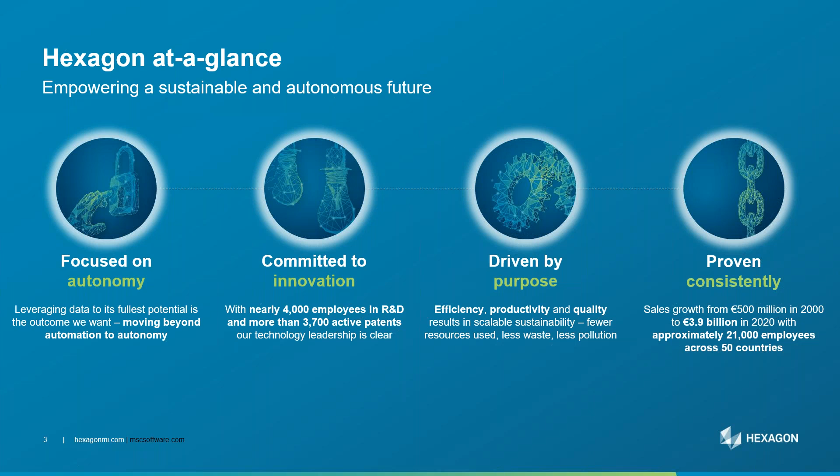So Hexagon is a Swedish-based multinational company with over 20,000 employees across 50 countries. The revenue in 2020 was about 4 billion euros, and it focuses on autonomy in different aspects. And we are committed to innovation with more than 4,000 employees in research and development. The idea behind Hexagon and the mission is to go from mechanization to mass production and in the end to autonomy, so full autonomy,

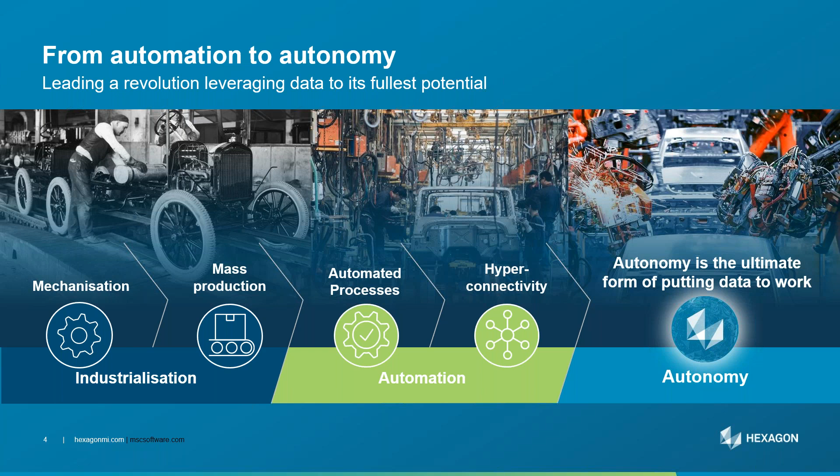profiting from the data. And Hexagon is actually originally a sensor or metrology company. Then it acquired many companies in the software area. And in fact, the idea is to connect the virtual world and the physical world. So just to make it a little bit clearer, Hexagon, as I said before, acquired many companies, and one of the companies Hexagon acquired back in 2017 is the well-known MSC Software in the US.

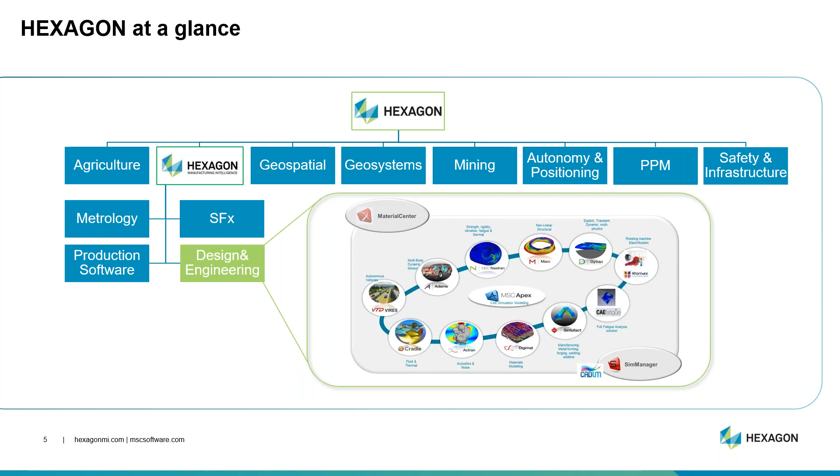And MSC Software is now named as design and engineering within Hexagon, and specifically one Hexagon division, which is called HMI, for Hexagon Manufacturing Intelligence, where we have different business units. And just to make it very clear, what I'm going to describe today will be focusing on manufacturing simulation, and this is actually this center of excellence. So as was said in the introduction, there are different centers of excellence within design and engineering, or MSC. One of them is called virtual manufacturing and costing. So that's the center of excellence I belong to.

And this center of excellence is actually the merge of FTI, so Forming Technologies Incorporated from Canada, Simufact, which is originally a German-based company, and another company called Amendate with additive manufacturing topology optimization software. So what we do here is we focus on process simulation.

So from sheet metal forming, that's basically FTI with Cost Optimizer for cost engineering, then FormingSuite for sheet metal forming, based on shell elements. Then we have the Simufact product suite, Simufact Forming. With Simufact Forming, one can model many kinds of forming processes, such as hot forging, cold forming, sheet metal forming, rolling, ring rolling, heat treatment, and so on.

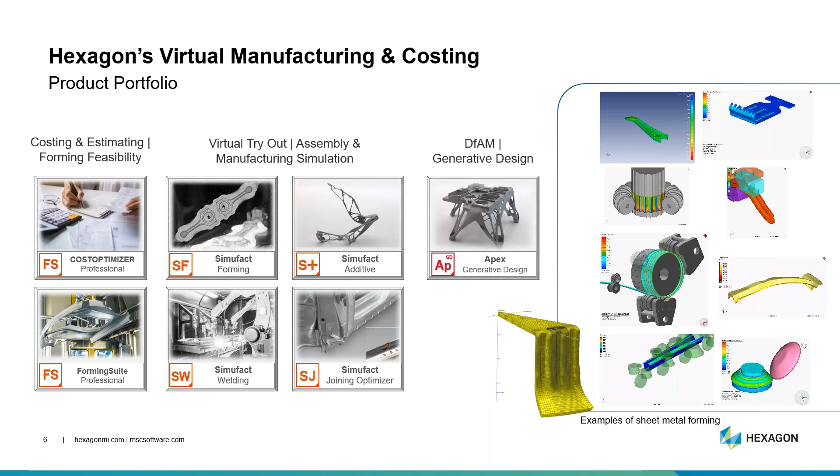Right, now if we go on to EV battery manufacturing and the fundamentals, I would say that if we look at the cells themselves, we have, generally speaking, three types of cells: the cylindrical cells, the prismatic cells, and the pouch. For each kind of cell, there are, of course, advantages and disadvantages. For the cylindrical cell, it's low density, low cost, easier thermal management, and hard casing.

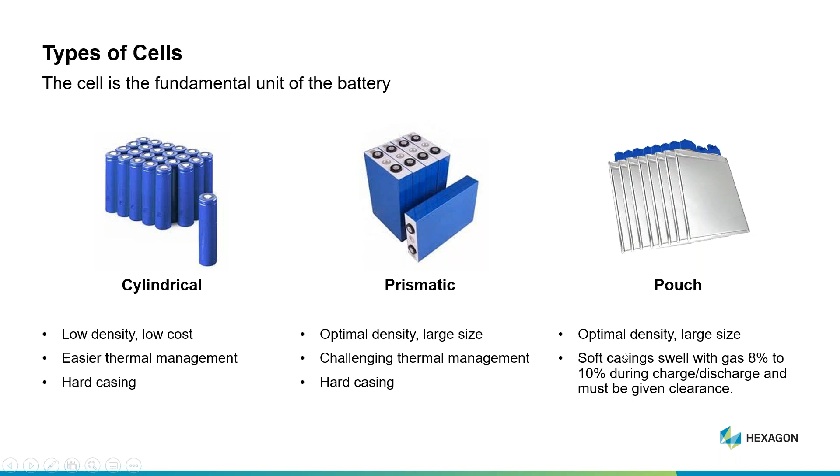Prismatic: optimal density, large size, thermal management has to be carefully taken care of, and there is also a hard casing. So for the first two types of cells, cylindrical and prismatic, we have solutions, and I will introduce these solutions in the next slides. The third one is a pouch type of cell, and for these kinds of cells, we currently do not have any solutions because there is a soft casing, and it's something we are not covering right now.

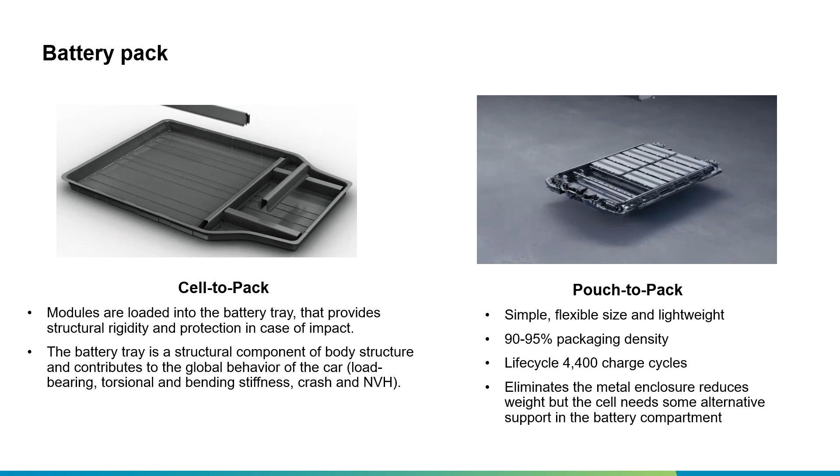Then the packs. So once the cells have been manufactured and put into modules, we need to assemble them into a pack. Be it the cylindrical cells or the prismatic cells, it's quite similar. The modules have to be loaded into the pack and welded and sealed. So now, what are the manufacturing steps of all these different cells and modules and packs? This is what we are going to look at more deeply in the next slides.

So if we look at the challenges with the manufacturing process, as you saw before, we are covering many other processes and industry segments. But for EV battery manufacturing, I would say the challenges are very similar to other industries. So it's a long development time.

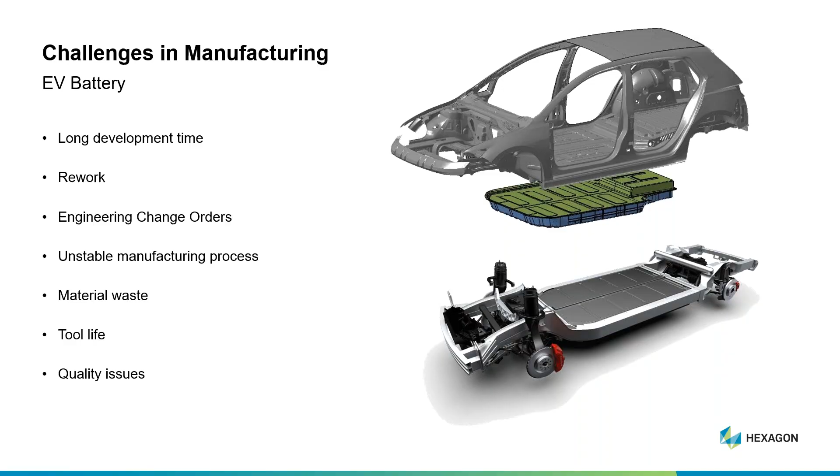And quality issues such as cracks or important thinning and so on. So there are a lot of challenges that need to be tackled in EV battery manufacturing. So what are the solutions that we can bring there? I'm going to go through some case studies about each segment, like battery, module or tray.

So at Hexagon, and especially the virtual manufacturing and costing center of excellence, we offer a suite of solutions or software that can help tackle these challenges that we just mentioned. So the first thing is the virtual tryout.

Instead of spending a lot of time doing physical tryout, machining some tools, trying on the press, for example for stamping, or on the weld side, the welding, we can do all this in the virtual environment. And we have solutions for that, such as Simufact Forming, mechanical joining module, FTI cost optimizer, Simufact Welding, and

MSC Apex. All these products can be used, and of course, we can chain the simulations, meaning that we could simulate one process, such as stamping or deep drawing, and then export the results into the welding tool, for example, keeping the residual stress or the strain information inside the mesh.

Then we can check for early forming feasibility. Even before you design the tooling, you might want to check: is this part feasible, or is formability guaranteed? Will I get tearing or any other kind of problems? And for this, we can use FTI Forming Suite to check all these early steps.

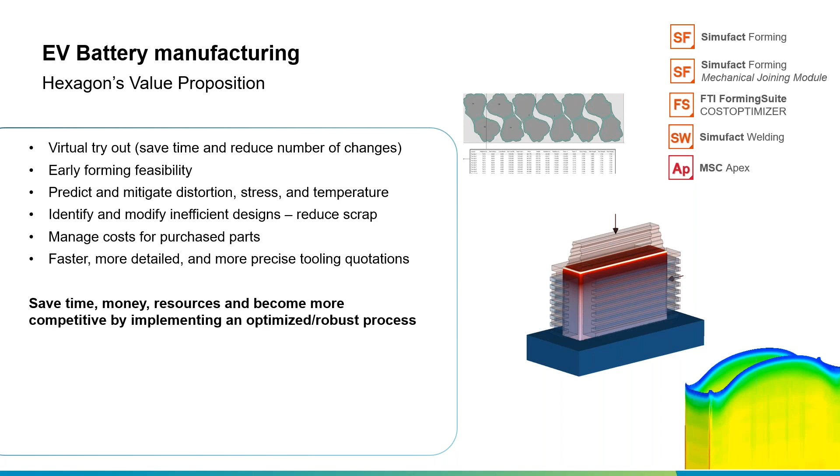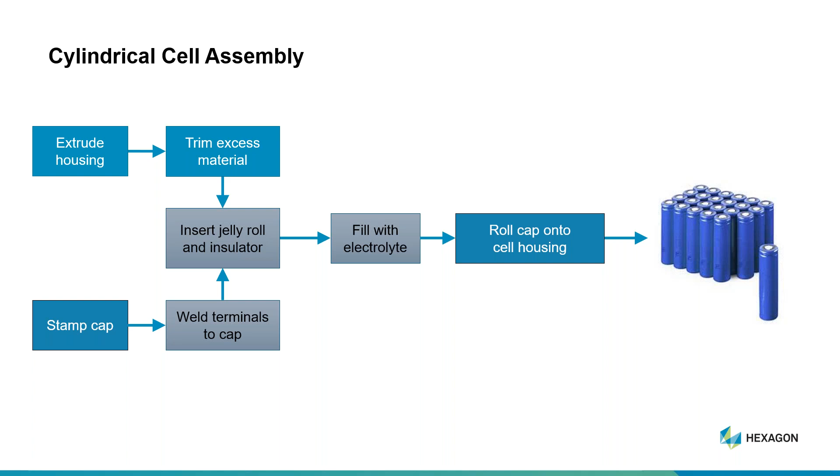You can see the battery housing could be extruded, then the cap is stamped, then there is a trim process for excess material on the housing, and then some chemical processes such as inserting the jelly roll and insulator, welding the terminal to the cap, or filling the electrolyte, which would not be covered by our solutions, and then finally roll the cap onto the cell housing. That's the process workflow.

A relatively similar process can be applied with prismatic cells. There is an extrusion process, so backwards extrusion, where we then trim the excess material. We have examples that I'll show in the next slides.

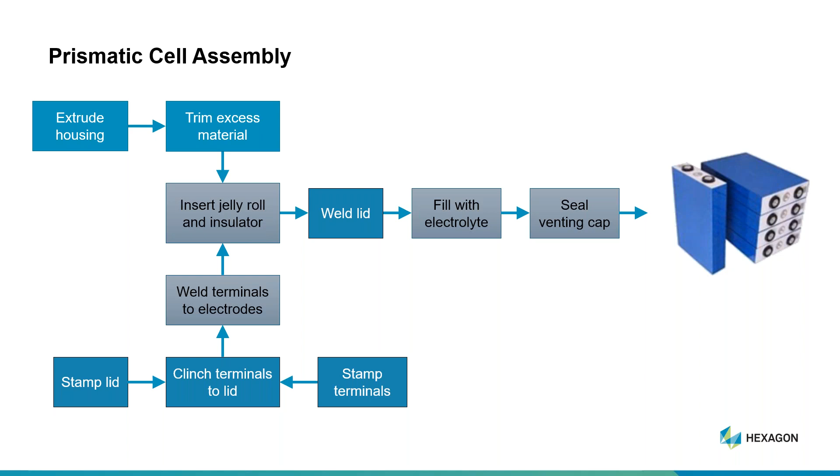Then stamp the lid, do some chemistry operations like inserting the jelly roll and insulator, weld the terminals to the electrodes, and then clinch the terminals to the lid, stamp the terminals, weld the lid, and then finish with the chemical operations such as filling electrolyte and sealing the venting cap. So now I'm going to show some simulation examples.

One thing I didn't mention at the beginning of this presentation is that all our solutions, Simufact Forming or FTI, are basically process-specific applications. Simufact Forming especially is based on the MSC Marc solver, but the user interface and the GUI is actually very easy to learn, and it doesn't require very deep knowledge of numerical sciences or FEA.

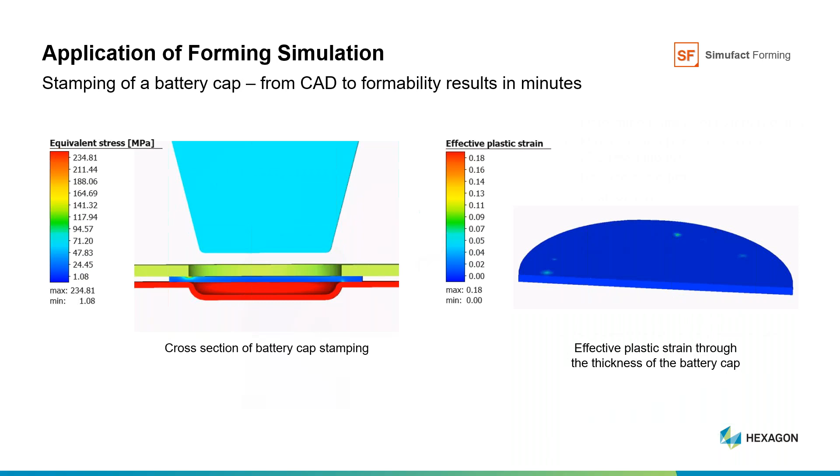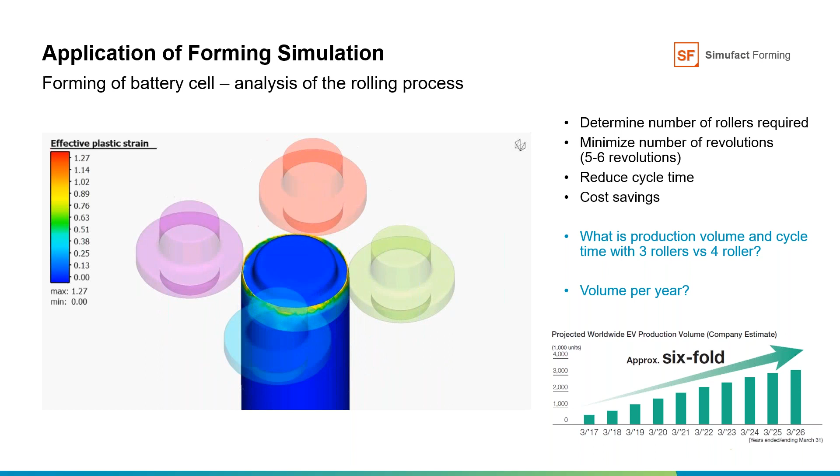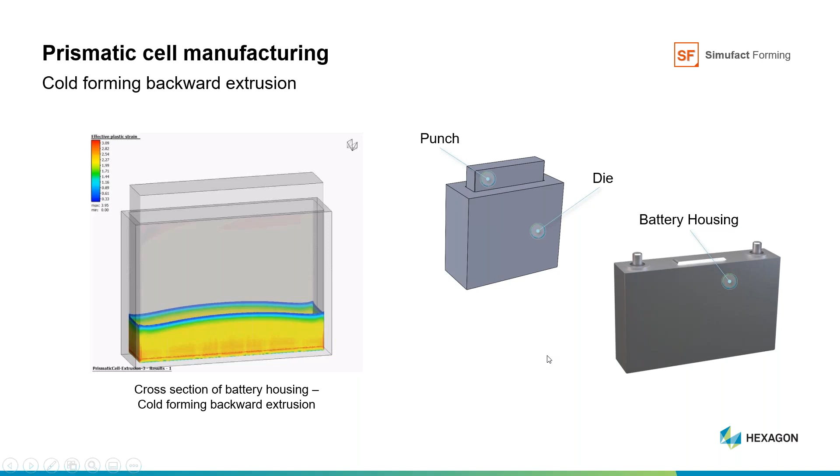So what can we expect from the simulation is obviously the final shape, and see where we need to trim, or if we need to perform a second extrusion operation, and also get information about residual stresses. These residual stresses will have an impact, of course, on the welding stage later.

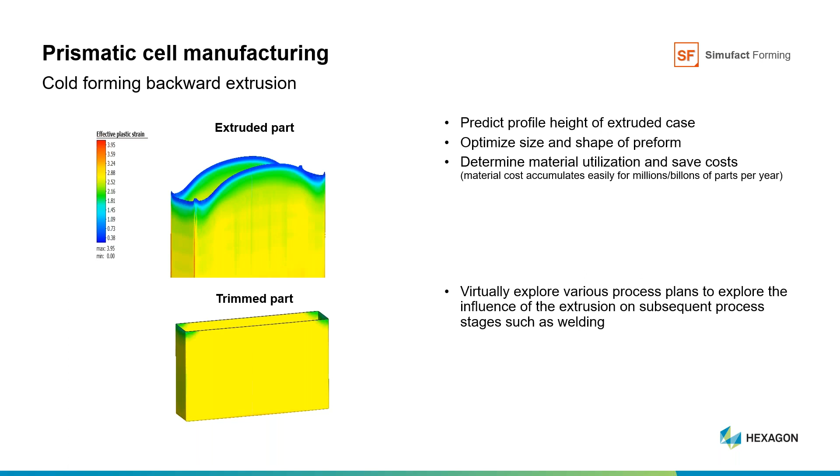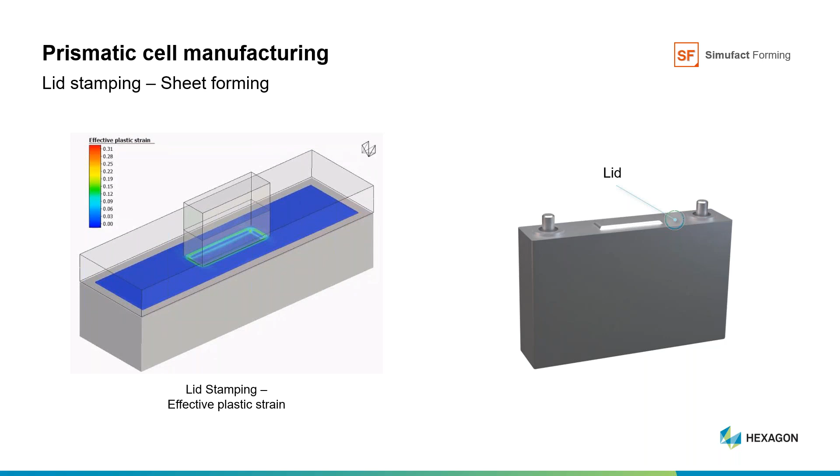Another component of the battery is the lid. So here we can simulate the forming of the lid and also the trimming. Here we haven't performed trimming, but it's possible in Simufact Forming to do also trim operations and evaluate the impact of the trimming on the final shape. So it could be just trimming or fine blanking. So again, in this stage, the user can, in a very early stage and even before manufacturing the dies, optimize this stamping and investigate springback and residual stresses.

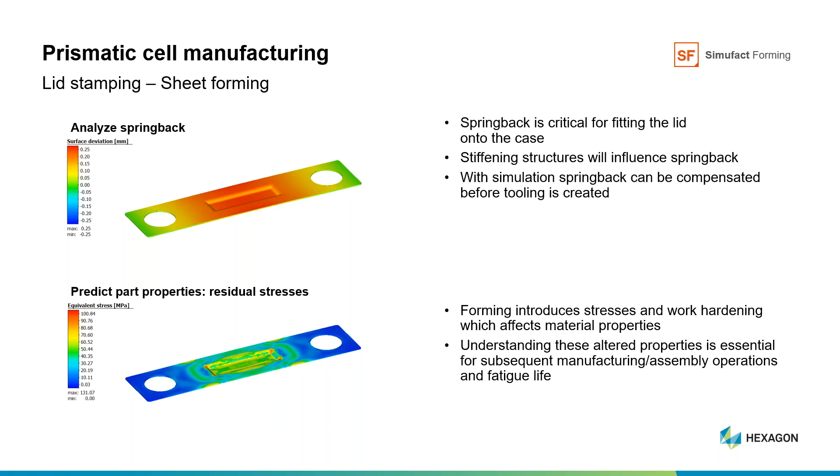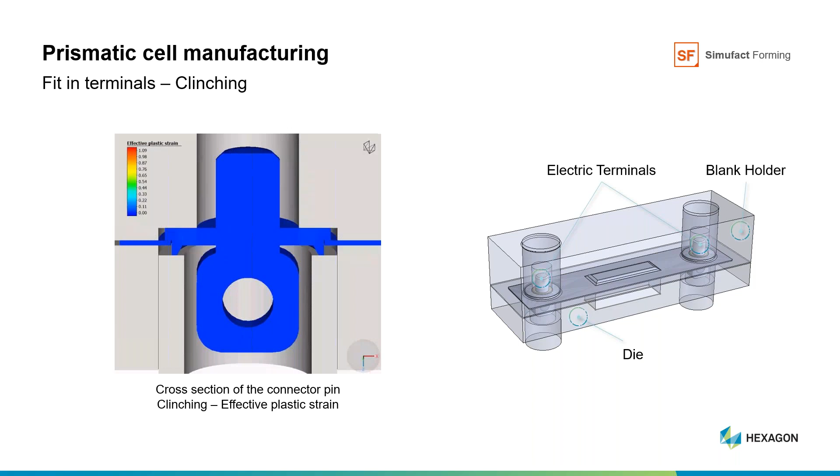About the terminals, we can use Simufact Forming also for connecting the terminals to the lid. This is a kind of clinching operation, and this can very easily be performed using Simufact Forming. So here again we have a blank holder, we have a die, and the terminals. So what kind of information can we get here? Of course, the material flow, then the quality of the connection. If I use so much stroke, then how is the material going to behave, and how good the connection will be between the lid and the connector.

Of course, in the battery manufacturing area, we need to have very sealed components to avoid humidity or water getting in the battery, or the chemicals leaking out of the battery.

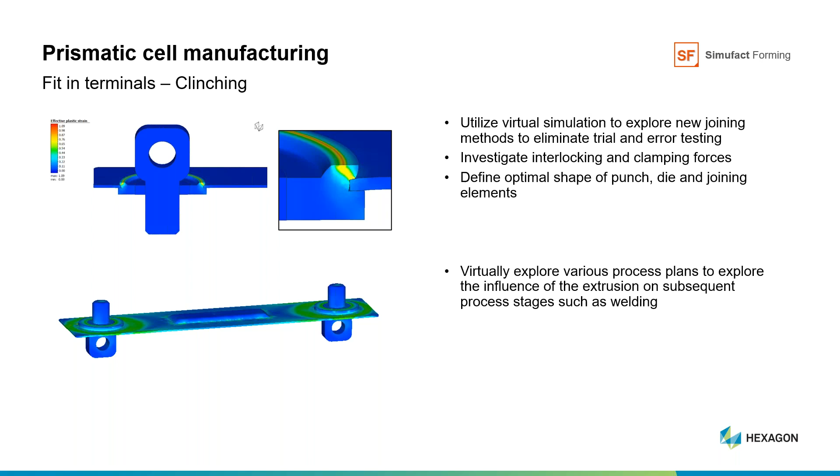Then once we simulate all these forming processes, we can use the welding simulation software and import the results of the forming stages into the welding stage, and investigate distortions, residual stresses, and what could be the best workflow or the best clamps or clamping system to minimize distortions and improve quality.

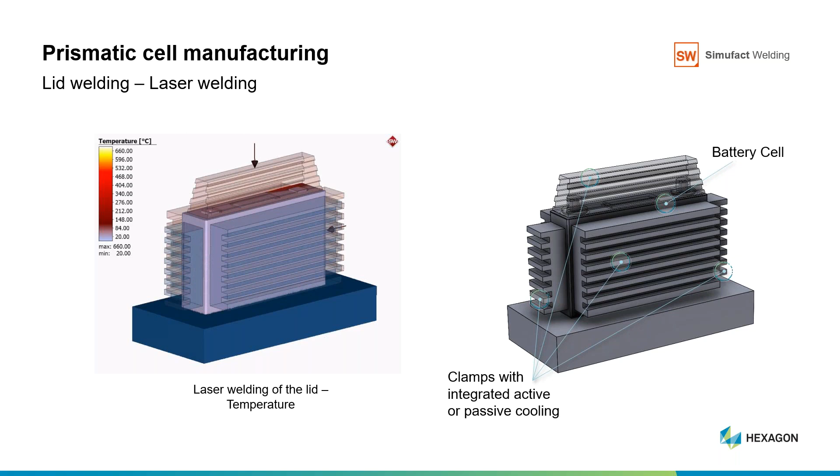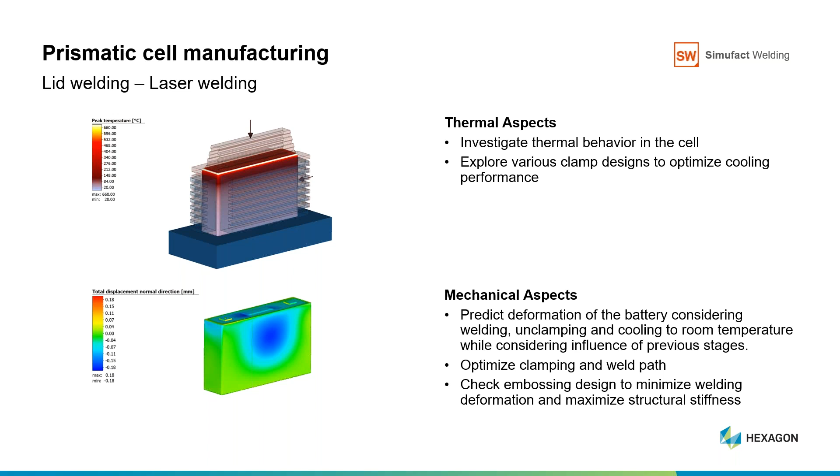So there are, again, thermal aspects. So we could investigate, for example, overheating, or also the heat affected zone in the cell, and also mechanical aspects such as distortion under the condition that we would weld from one direction to the other, or the welding sequence could be optimized virtually before even trying it in the workshop. Right. So that's it about the battery cell manufacturing.

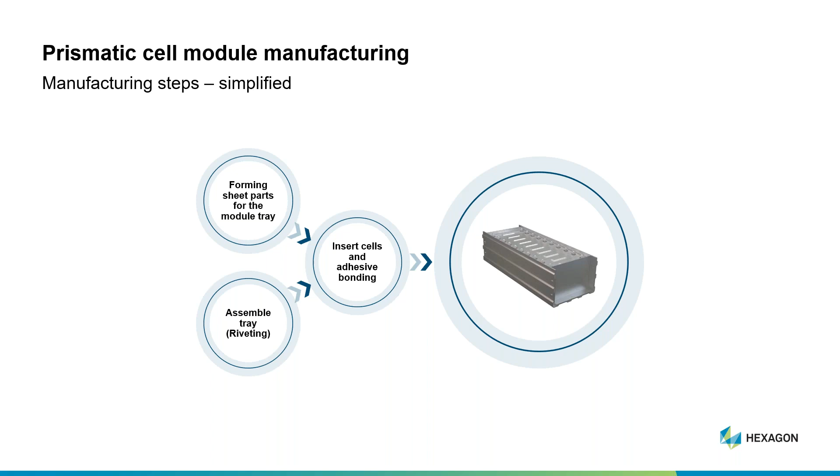Then many customers, of course, don't manufacture batteries, but maybe battery modules. Our solutions can be applied to this kind of process. So again, a simplified manufacturing workflow would be to form the sheets of the module tray, then assemble them. Here we used, as an example, some riveting. They could be also welded, but in this case, we are showing riveting. And then the cells, in this case the prismatic cells, are inserted into the modules, and typically they would be bonded with some adhesive material.

So in Simufact Forming, we have a special module called mechanical joining that would investigate different kinds of mechanical joining processes, such as blind riveting, or in this case here, self-piercing riveting. In this battery module, we can see that the customers used self-piercing riveting to connect the different sheets. This module allows for the prediction under different conditions, for example different sheet thicknesses or different materials, to predict the behavior of the sheets and the rivet, and assess virtually the quality of the joint.

There are different criteria to assess the joint quality, such as interlocking, so the penetration of the rivet inside the lower sheet, or also the residual thickness of the lower sheet. And these criteria are well known. The Simufact Forming joining module allows for the automatic evaluation of such joints.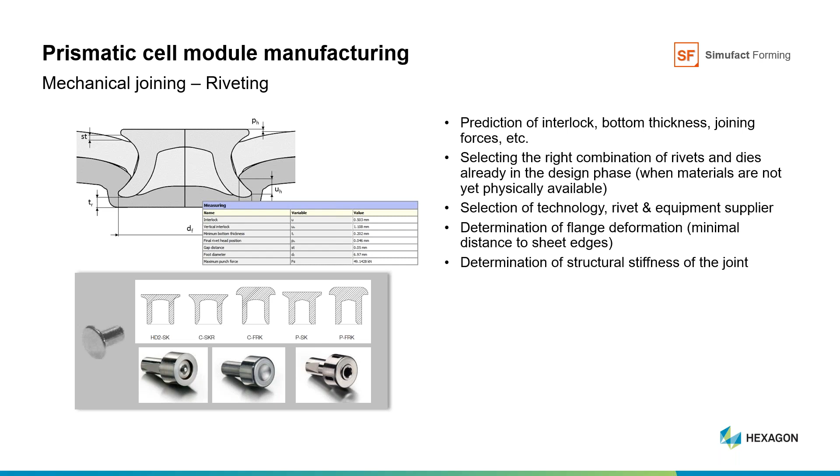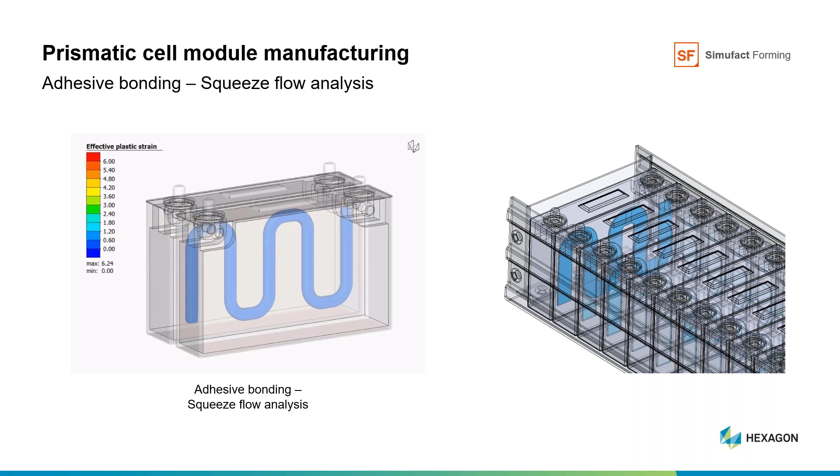So that's a summary of what I just said. And on top of that, not only can we investigate the location of the adhesive material, but also loads. So what is the load that I should apply to these batteries in order to get the right location of the adhesive material?

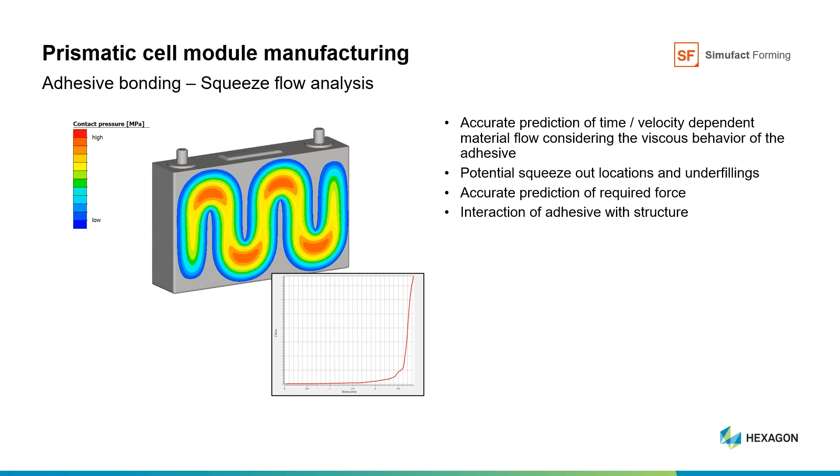Finally, we are now moving on to the tray. So we saw our solutions in the cell manufacturing, in the module manufacturing, and now we are going to look at the tray manufacturing. There are different technologies, but one of them could be deep drawing or stamping of the tray. In this case, you can see the size, about 1.8 meters wide and 2.4 meters long, with a weight of 58.7 kilograms. It's not easy to determine the true weight without doing any simulation or physical testing. So using Forming Suite from FTI, we can get a lot of information at a very early stage.

And one of them is the material utilization. This solution can optimize the nesting, for example, of the sheets on the coil, and optimize material utilization. Of course, here we are talking about hundreds of thousands or millions of parts. So if we can save even 1, 2, 3% material, it will amount to millions of dollars.

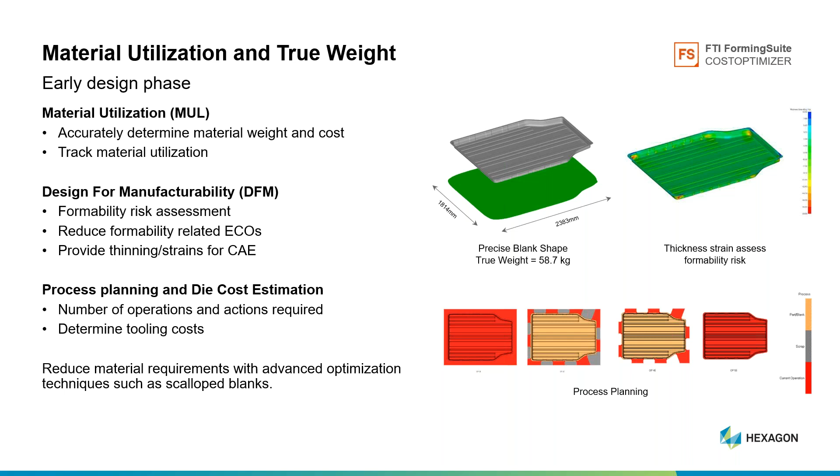Then FTI can also give very valuable information about process planning, how many steps, how many stages, and so on. And this also, of course, has an influence on the final cost of the part. So the earlier you know what kind of issues you would have and how much it will cost, the better it is for process robustness and cost savings.

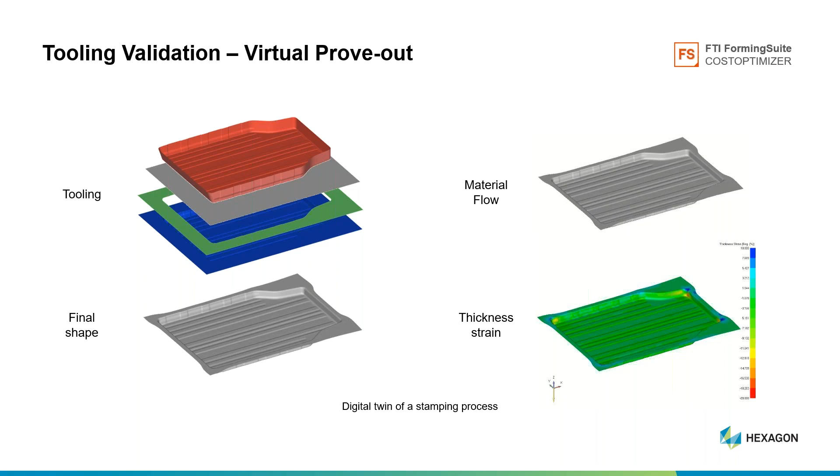So that's an illustration of what I was just mentioning before. We can see here the material flow of this battery tray stamping, and also the thickness strain. And also recently FTI developed this 3D addendum, to generate the tooling based on the final shape of the part. Then the results.

From the latest versions, we are able to import into Simufact Welding. So when we want to simulate the welding of this tray, we can use FTI Forming Suite and use the result as an input into Simufact Welding, getting more accurate results than if we used only the CAD or the ideal shape of the tray. Now we are able to import simulation results, which are much closer to the actual parts or to reality, into Simufact Welding.

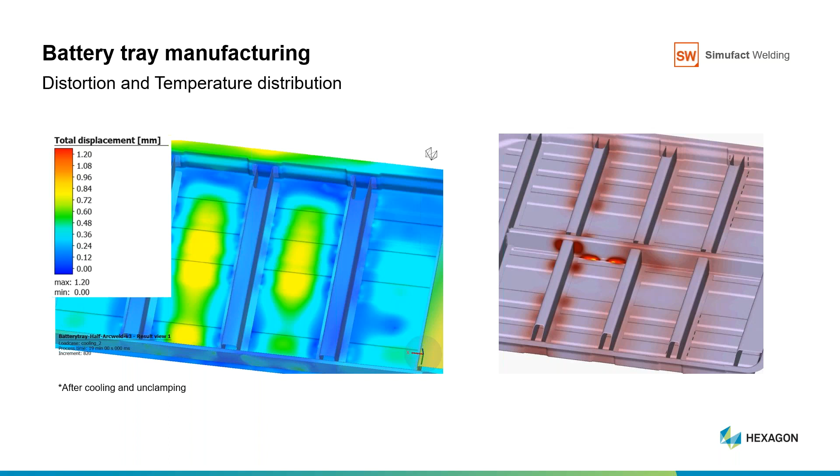So Simufact Welding, as I said earlier, is a process-specific software that covers any kind of welding operation, and the purpose here is to predict distortions and also residual stresses. We can see on the left-hand side the displacement, and in some places displacement is about 1.2 millimeters. We need to know that prior to welding the tray, of course, and this tool gives us this ability.

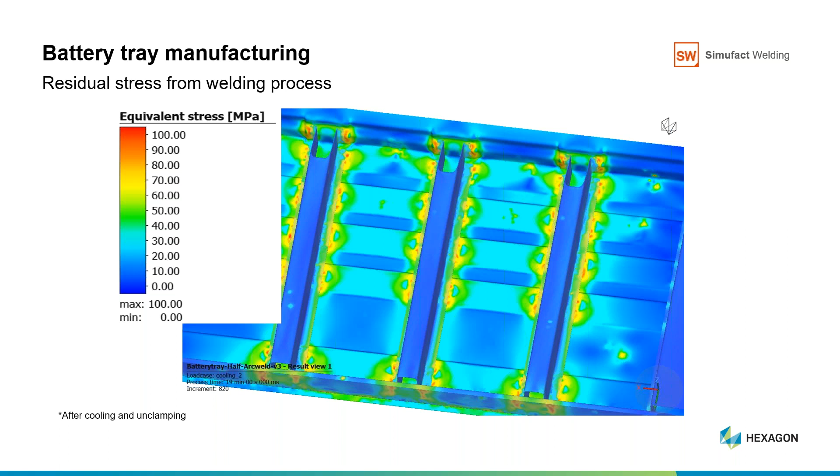We can also see at the end of the welding process the residual stress, and as you may know, within the MSC Software portfolio, we have different capabilities such as structural analysis with Nastran, or fatigue analysis using CAEfatigue. And it's possible to export these residual stress results from Simufact Welding into these MSC packages to take into account residual stresses in these subsequent analyses.

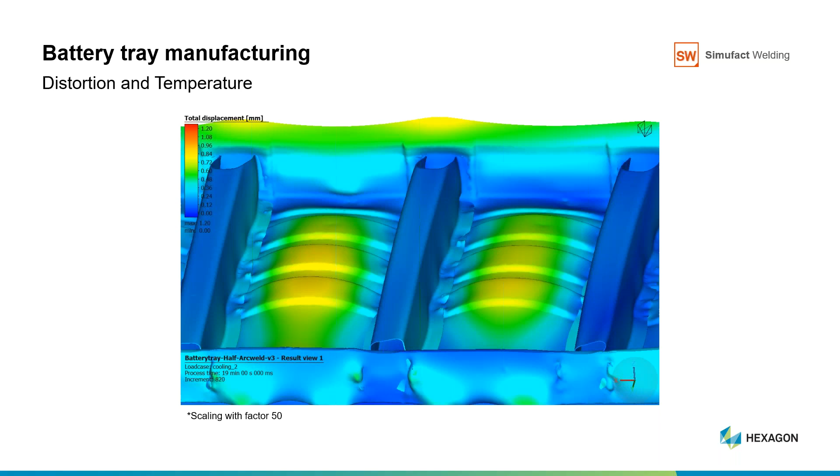think of, in the stamping stage, stamping the tray so that after welding the distortion would be more or less zero. So if we can predict the behavior of the tray during the welding process, we can anticipate it and stamp a tray that has such a shape that after welding it would be flat, or the distortions would be minimized.

So I'm now coming to my conclusion. I think we could discuss in this webinar that we have different tools at Hexagon to predict at a very early stage the behavior of the material, and to optimize the material utilization. And whichever the process may be, we have a solution to simulate in a very easy and relatively fast, sometimes very fast, way the forming, the welding, or the assembly and joining of different components.

Starting with FTI forming suite, Simufact forming, MSC Apex for mesh generation, Simufact welding for welding simulation, and the joining modules of Simufact forming for any kind of riveting or mechanical connection.